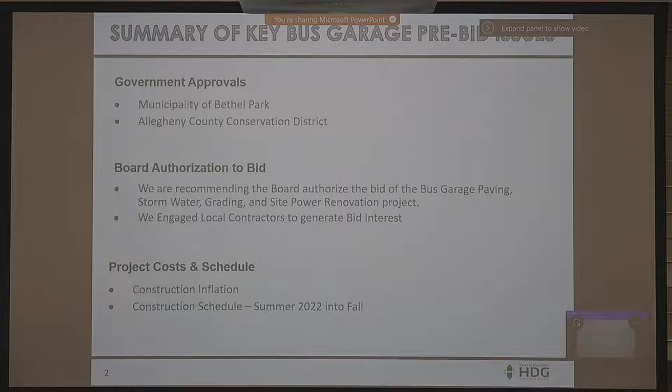Any other questions? All right, hearing none, we're going to pivot to Site Logic, and I think they're going to talk a little bit about Phase 1.

Good evening, everyone. We just got a brief update regarding the construction progress on Phase 1. Got a few items I want to touch on briefly. The first of those is contracts—at this point in time, all subcontractors have been selected for Phase 1 of the project. We've got contracts currently circulating; several of those have been executed at this time, and we've got a handful of other ones currently out for signature.

In regards to clearances and security, subcontractors have begun submitting those to us and to the district for review and approval to grant them access to the building once they begin construction.

The next topic I want to touch on is material procurement. At this point in time, we are working with HDG to review, approve, and release all products associated with the project.

We're focusing in on long lead items at this point in time just to mitigate any supply chain risks associated with those. Finally, the last thing I want to touch on is general schedule. Last week we had a project kickoff meeting on Thursday, April 7th up at the middle school with all subcontractors just to go over the scope of the project and get everyone ready to mobilize and begin work up there.

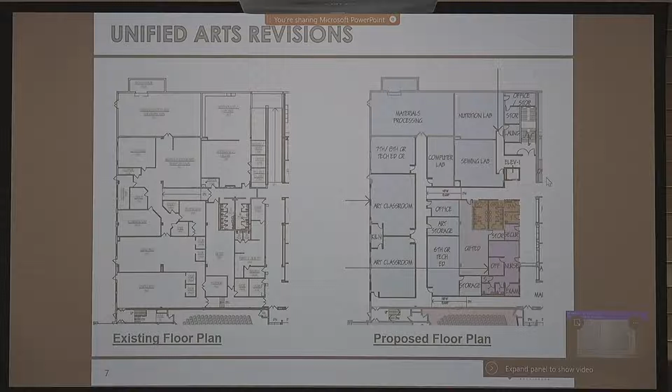Anybody have any questions on that layout? Any comments? Okay.

So I think the next section I wanted to show you guys is the cafeteria. Like I said in the program summary, if you look at the bottom right of both of those images, that's where the kitchen is today. The first thing we looked at doing was knocking out the wall between the serving area and the cafeteria.

If you're familiar with what the high school has today, there are those rolling grills that come down in the evenings out in front of the serving area, and that's what we would envision instead of that wall - so that during the school day it's just open, with serving lines, creating that modern food court style approach.

We worked with our food service consultant and met with Joe Consulmag to talk about the equipment needs in the kitchen, replacing outdated kitchen appliances and equipment - a lot of it is 25, 30 years old. This shows the walls and how we would incorporate the new kitchen equipment. If you look in the top and bottom left corner of the cafeteria, there's a space there called the deli.

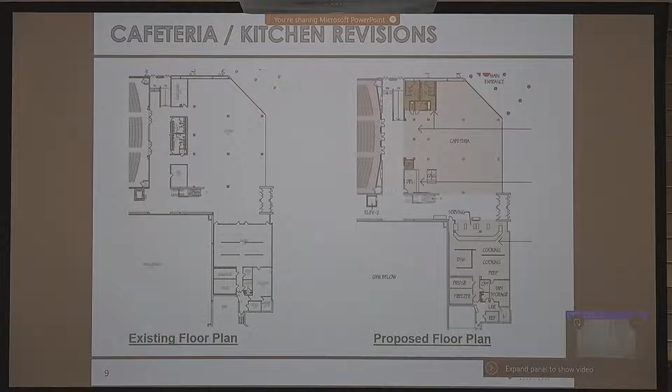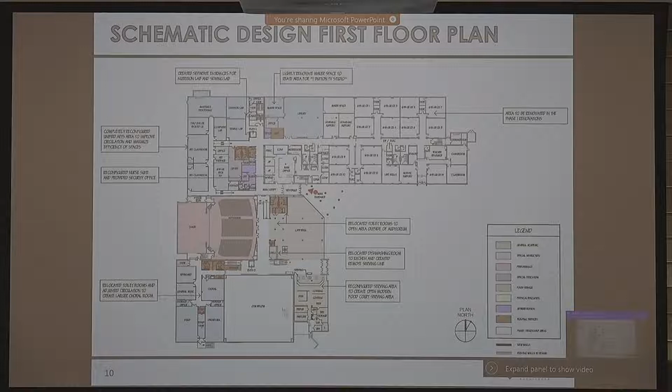All right, Doug, you can go to the next one. So that was the orangish area on the right side of the plan. And now we're going to - I believe the next one is the music suite.

Yes, so the change here was again moving the restrooms. If you look at the left side in the existing floor plan, you have a very similar issue where you walk in, and if you're going to the band room, it kind of takes you to a dead end around those toilet rooms. There's no continuous loop there.

After listening to everyone talk about how the music department really works and functions, we looked at moving the restrooms to the top of the page - you can see that brown area. This eliminates the location of the existing general music room and moves general music to where choral is today, creating a larger choral room that'll better serve the needs of choral.

We're keeping band and orchestra where they are today, just doing some things to the walls there at a minimum to help with the acoustics. We also eliminated some doors - on the left side of the page, the storage room between band and orchestra has a bunch of doors, and that's not helping their sound issue. So we're closing off some doors and creating a dedicated storage room for orchestra instead, trying to button up the sound issue between band and orchestra as best we can.

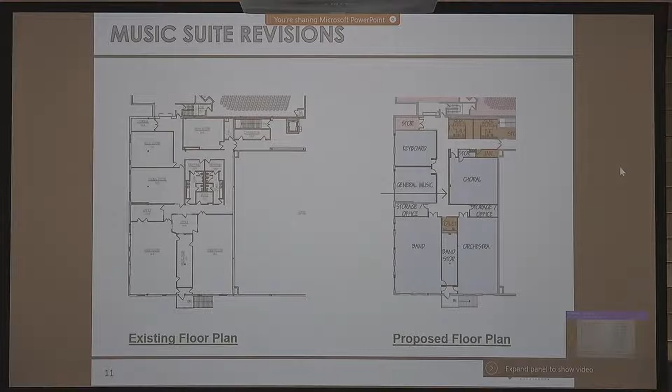All right, so this is the second floor here. There's no enlarged plans of the second floor because we really aren't doing a whole lot of reconfiguration up here at all. As I said earlier, we're keeping the classrooms in pods of 5 around the whole perimeter of the building.

The one thing I mentioned when talking about the building program was the idea of trying to improve circulation and encourage routes to exits. One thing we adjusted here is on the left side of the plan, just above the auditorium - there's a hallway that runs left to right, and we're getting rid of that hallway because it's not used for daily function, and widening the hallway right where that arrow is. That will encourage more students from that pod to start using the stair next to the auditorium to go down to the Unified Arts area.

That drops you right down into where the art, family consumer science, and tech ed spaces are. Today, if you go down that stair, you end up right in the art room, so it can't really be used for circulation. Again, we're trying to get kids to use more paths so everybody isn't going to where our new stair and new ramp are - just helping the circulation. That's one of the changes we did up there.

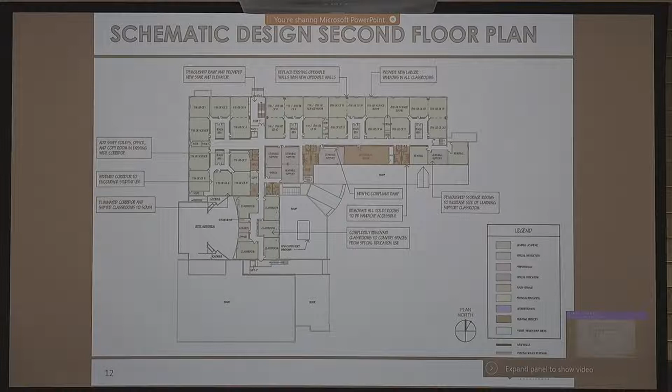Okay, down all the way - I like to do this in reverse. I like to do the first floor, second floor, and go all the way back down to the ground floor. All right, so ground floor.

On the left side of the page, you'll see the locker rooms today - I think there's something in the range of 750 lockers in there right now for each gender. There are big spaces where there used to be shower areas that aren't used. So really it was, how can we reconfigure that space so it's better utilized? Reducing the lockers down to what, after talking to the district, feels like the appropriate size for a middle school locker room at this point.

So on the right side of that renovated area, you'll see the locker rooms that were reconfigured. Both of them have access directly off the gym, and both also have a second access off that new hallway we created. Each of them have 60 lockers, a restroom area, 2 shower stalls, and an office for the PE teachers.

Similar to other subject areas, we met with the PE teachers to go over this and made any modifications based off the feedback we got from that.

On the left side of the renovated area, you'll see what we were able to do with all that extra space, creating two health classrooms that we were able to situate so they can actually have windows. That's if you're familiar with walking around to the back of the gym, basically where those double doors are on our new plan, and a little bit lower than the new double doors.

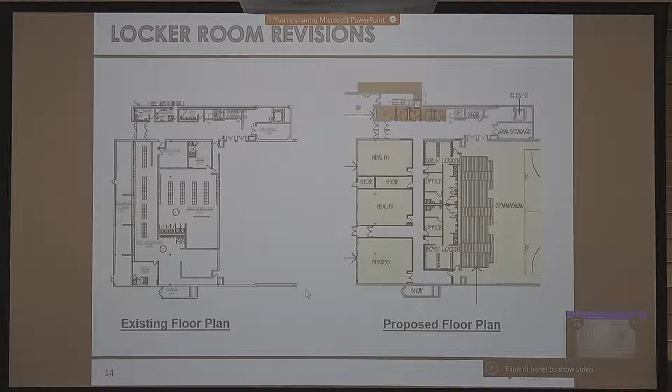And that's the flip side. I would say that the locker rooms, feedback I got from some staff members that you met with and proposed your drawings to, were very happy and excited about what they saw, because it did reopen everything down there and gives them the space they were looking to get. So yeah, they were very happy with that. Good.

Any other comments on the floor plans? The next couple.

So just the last thing, kind of a minor code issue here, is creating another way out of the gym. Today you only have two ways out of your gym, and just due to the size of the gym, to meet current code, that's kind of why we have that looped hallway that goes around to the bottom side of the locker rooms that connects into the back side of the gym there.

It's really to create a third way out of the gym, and that's why we also have another set of double doors that take you to the exterior of the building there. Instead of just having that hallway come up and meet the hallway on the north side, we needed to create another way out of the gym to meet current code and get you out of the building.

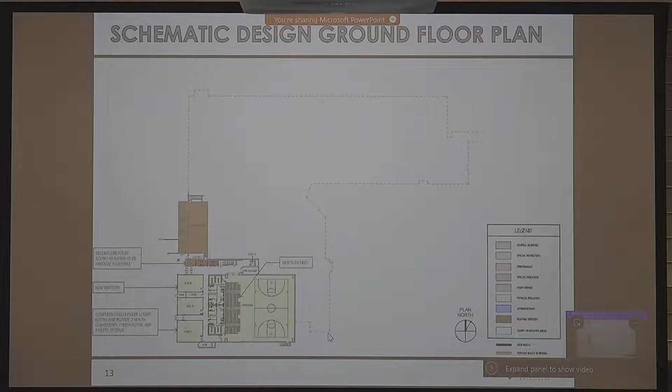Okay, then let's go to the exterior now.

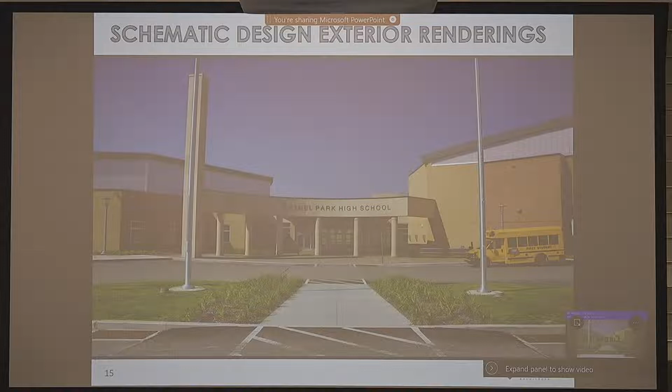If you go to the next slide, you can see where we evolved the front entrance to. Taking the metal panels that we showed you back in December and bringing them into the front entrance, tying both the cafeteria on the left side - we're standing in the parking lot looking up at where the existing canopy is today. That's the cafeteria on the left side, and the right side is what we're calling the 6th grade wing. So those are two different elevations.

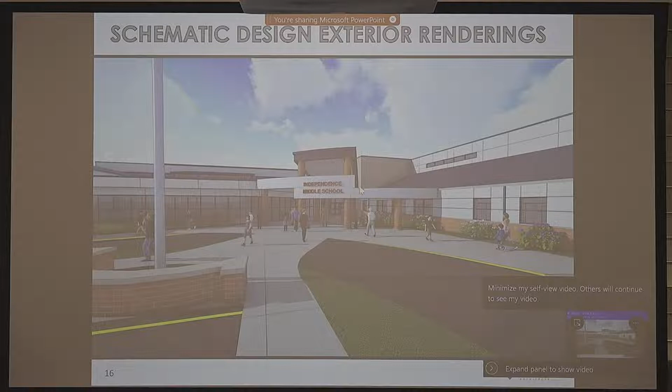Using that canopy to tie those two elevations together, having it staggered like that, using some brick piers to match some of the existing materials, that red brick that you already have on the bottom of that 6th grade wing, tying the canopy at the front of the building to where the flagpole is today, to clean that up a little bit and create a better sense of entry. Then over top of that canopy, above where the building signage is, creating a sloped canopy entrance there to give it some cover and some height.

If you go to the next image, you can see it zoomed out here. We started with the front entrance, wanted to make sure that definitely felt like a new front entrance. I think a little bit of what's going on today is it's hard to tell exactly where the front entrance of that building is. So a couple other things we did to the front here.

Starting on the left side, that's the cafeteria/auditorium entrance today, and we're not modifying it at all, just changing the color of the roof, painting it blue. If we use the right types of paint and it's applied properly, it'll be fine to paint that a blue color to match the other roofs that we're replacing.

Over top of the cafeteria, one of the things that evolved in the last couple months is that the cafeteria roof is leaking. Some of it is due to the skylights that are in the cafeteria. So what we were proposing to do is take the skylights out and put in a clerestory, which is basically 4-sided windows with a roof over top of it, which won't leak like skylights tend to do over time.

Then working your way around to the 6th grade wing, like we showed you in December, replacing the metal roof over the 6th grade area with a blue roof that ties that all together. Over the last few months, one of the things that evolved on this elevation was taking the entrance to the 6th grade area and trying to make it look like a side entrance, similar to the cafeteria side entrance, to tie those two together. So you have the 6th grade entrance, cafeteria entrance, and then the main entrance looks completely different. I think the building signage helps where the main entrance is, but we're trying to have these side entrances have a similar feel to them.

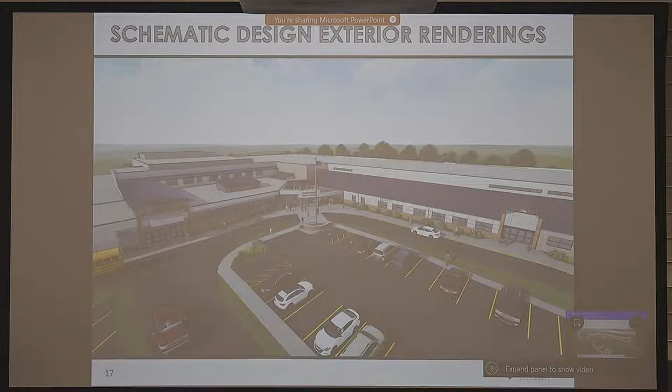I think it has an impact on the material selection also. You're going to use aluminum or vinyl or whatever, and using fasteners that are exposed - stainless steel fasteners, those kinds of things.

Doug wants me to go to the next slide.

Keeping us going. All right, so this is the back of the building, and we wanted to also take a look at this. You can see this from anywhere down over the hill. You can actually see the auditorium volume from the parking lot right here. So this is almost as big an impact on how this building feels as the front of the building does, just from the rest of the community.

So if you go to the next slide, what we wanted to do here was a couple things. One, take the auditorium volume and give it some life. We're not going to put windows in the auditorium, but put some light metal panels on the face of the auditorium wall to give it some color.

You can also see here where we're taking the existing window openings and making them larger to bring more light into the classrooms. And then to help break up the sea of brick, we're taking some thin corrugated metal panels and putting them sporadically around the windows. The reason we did that is it was way too heavy of a feeling to wrap the whole building that way, so this just allowed us to introduce a little bit of that on Educational Boulevard too.

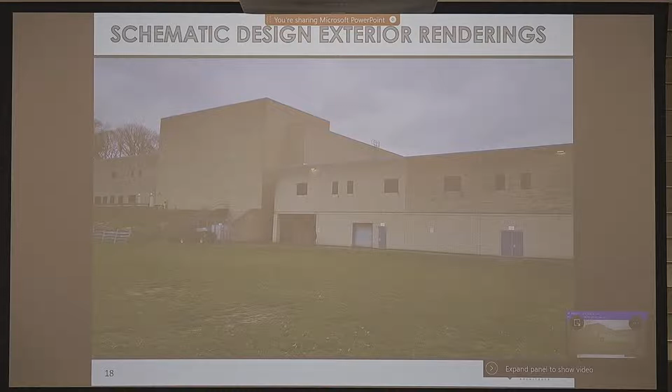So what we are proposing to do is take a stain and apply it to the concrete block. That stain will absorb into the concrete - it's not like paint, it won't need to be repainted. It'll stay on that block, absorb into it, and stay for the life of that block.

And if you go to the rendering, we're suggesting using the same color tone that is up there today. It'll just hide that discoloration wherever we have to patch block, or even where the existing discoloration is today - you clean the building and apply that stain, so it looks as close to what we're trying to show you with this rendering as possible.

And it's important to say that the stain is semi-opaque, meaning it actually has solids in it. So it doesn't just bleed into the block - it bleeds in and bonds with the block, but it also creates a more uniform appearance because there are some opaque solids in it.

Okay, I have a question because my dad was in whitewares and ceramic engineering for 45 years. The worst thing he ever told me was don't you ever paint a brick house.

You took something that did not require any work, and now you have to do something to it. So what's that stain going to do to that block? Well, that's why we're not going to use paint - the stain is still something that adheres to the block, which is exactly what paint does. So is it going to release?

No. The paint adheres to the primer, the primer adheres to the block. It's a coating - paint is a coating. Stain is not. Stain actually penetrates into the concrete material of the block and becomes a permanent part of it. So it doesn't flake off, it doesn't bleed off. It bonds and stays.

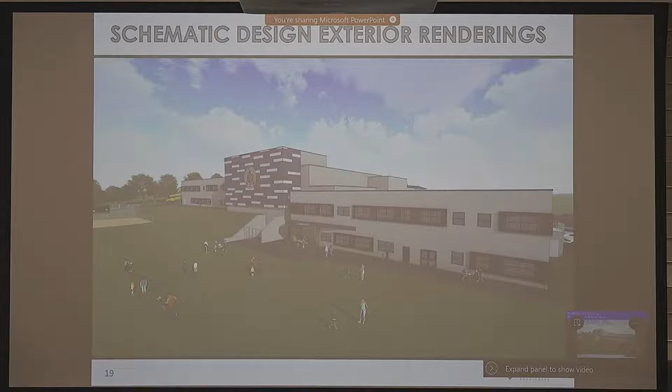If I can also point out one additional item - notice on the old photo you can't really distinguish where the entrance to the gymnasium is. Now there's a canopy above with the word gymnasium on it, so when visitors come, and we'll probably put some signage on the corner of the building pointing to the gymnasium so folks know where it is. That ties it all together. On the Education Boulevard side where we add another exit, we'll do a similar thing there as well, so it ties the front and both sides of the building with the same look.

That's good, I'm glad you brought that up because I had a neighbor who asked about signage, recommending that we have better signage because it's hard to find things - for visiting teams, for sure.

I don't intend to go through this line by line. I kind of put it up here as a reminder for myself in case there's anything I didn't go over already when we were going through the floor plans.

I guess we didn't talk about the auditorium at all. We did meet with the auditorium folks to talk about some of the concerns there. We're proposing to replace the seating, which is very old. A couple other things that came up were making slight modifications to the existing rigging system, which has problems with the back curtains, getting some speakers in there since there's only one speaker in the auditorium right now, which is hard to believe, and looking at replacing some failing theatrical lighting. So just a couple things added into the systems of the auditorium.

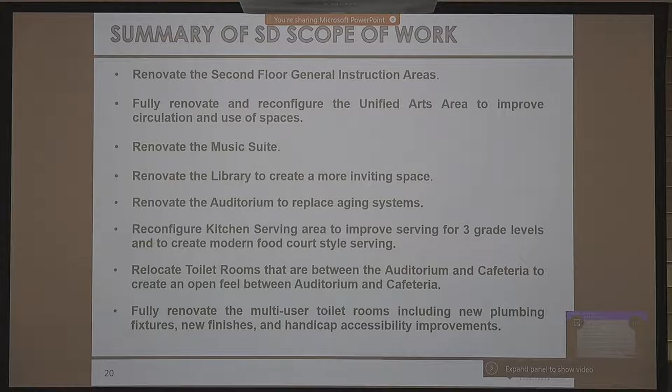If you go to the next slide - every toilet room in the building will be handicap accessible and renovated as such. Just a couple things down in the gymnasium: replacing the bleachers, which are blue bleachers that I believe are hand-me-downs from somewhere, the divider curtains are pretty tattered and in poor shape, the basketball backstops are original to the building, and we're improving the look with some new acoustical treatments in the gymnasium.

A couple other things up here - replacing all the HVAC throughout the building. I think we've talked about that before, and all the ductwork and HVAC supply below the ceiling.

On the elevations, you saw the windows, replacing the canopy at the front entrance, and the metal roofing. And then the last thing here, kind of ending the scope of work summary, is considering to replace the low slope roof system, which is the roof on the rest of the building.

This was not something that we had discussed doing before, but we just want to update you guys on how we got here with this.

So during the feasibility study, we asked Garland, and we actually brought Sam Roberts from Garland. He's sitting behind us to answer any questions that may come up after I give a high-level overview. We had Sam come out and take a look at the roof in the feasibility study. Garland has the warranty on this roof and a number of other roofs in the district, so we asked them to come out and take a look at it. At that time, no leaking was reported, and the roof looked okay, so we didn't recommend including anything with the roof. It still had, I think, 6 years at that time of warranty left.

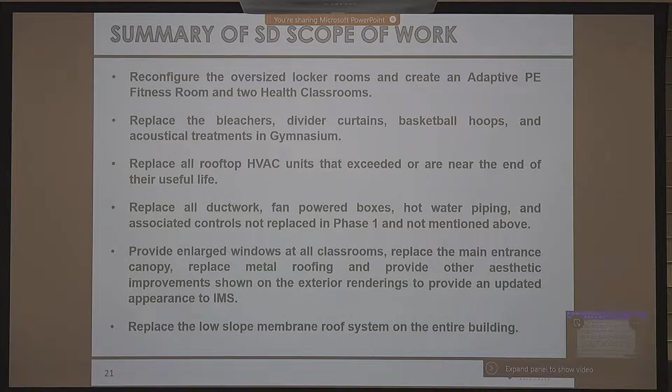Have you ever seen Shawshank Redemption? Everybody's seen that, where they were mopping down hot asphalt and felts. So you have 2 layers of felt and then a little bit heavier cap sheet on top, and then a flood and gravel surfacing.

That particular system was designed for 20 years. The weakness of that system over time can be inflexibility of those felts, right? They don't have the expansion and contraction as, say, a modified membrane would have. So over time, those could begin to have some issues.

Now, I will tell you, our roof isn't designed to only last 16 years and then start failing. We do believe there are particular reasons why those certain areas have started to leak, and we can fix those, because the rest of your roof system, a full 95% of it, is completely dry. So there are particular areas that we're dealing with this issue.

But the new system that we would recommend is to go with a 2-ply modified system. So what that is, you have multiple layers of woven scrim with asphalt that's modified with rubber, basically. And what that does is it gives it good flexibility, good UV resistance, and you could look at doing a different surfacing. Instead of flood and gravel, that's a little bit of a traditional type approach to roofing. You could look at something a little bit cleaner, maybe a little bit lighter colored, brighter up there on the roof, like a mineral surfacing or a coated mineral surfacing that's going to be a little bit cleaner, a little bit easier to inspect over time.